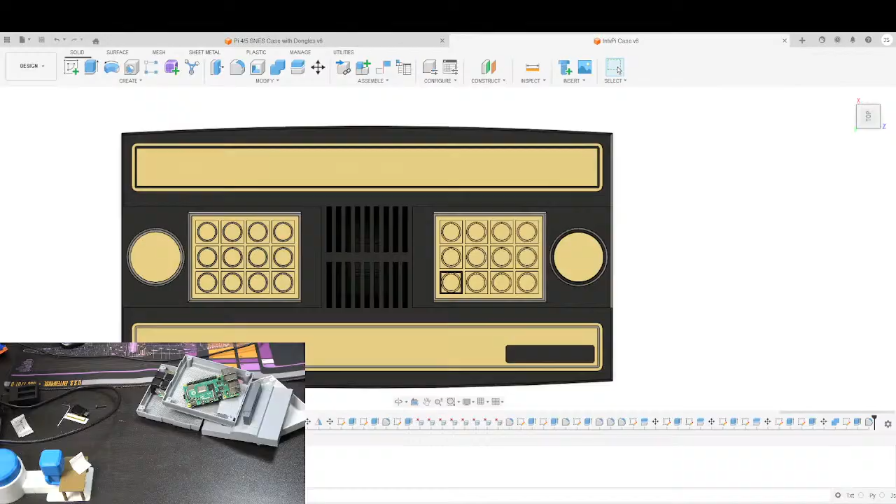So let's go ahead and swap. This guy. Yeah, we'll abuse this one and blow it up. Good enough for now, we don't need perfection.

Remember, you may recall that during the stream last week I said, oh, I don't have a model for the Raspberry Pi 5, so I'll just use the one for the 4 because they're basically the same. Well, as you can see, this is the first bottom shell that I printed. Oh, I didn't realize how far into this I was going to have to reach. Okay, 2 seconds here. So this is the first bottom shell that I printed.

There's the ports and everything on it, and if we go ahead and drop our Pi 5 in, you can see the ports line up. Oh, there's no headphone jack on this one, and what you probably won't be able to see is that the screw holes and everything also line up when it's properly positioned.

So you think all is well. Well, then I went to put the lid on it, and my USB dongles end up stopping it from closing. So at first I was like, oh, I must have mismeasured something. That's not too big of a deal.

But no, my mistake comes from, if we take a Raspberry Pi 5 and 4 and put them side by side, you'll notice that the Ethernet ports end up together. The USB ports are on the opposite side. So while I did measure these ones for the proper height, it was assuming that the USB ports, because I used the model for the 4, would be on this side.

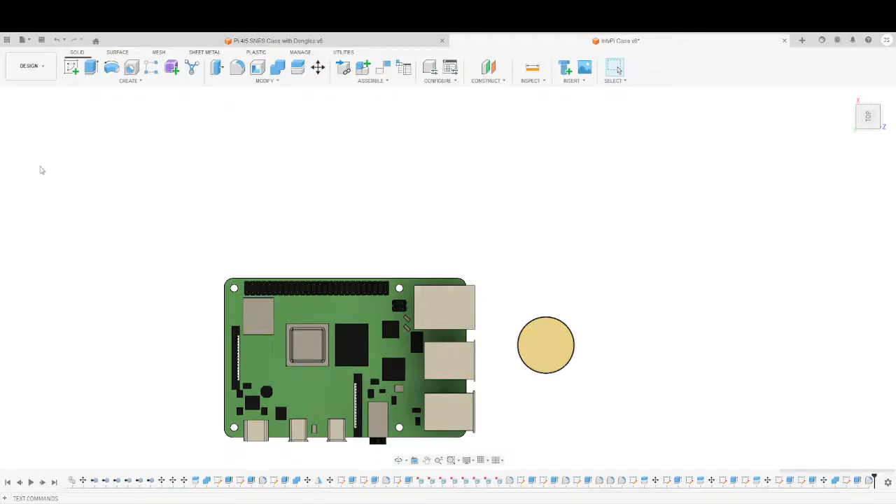Hey Nathan. Well, I don't have a good recommendation for a free one because I haven't used many. No, that's what I'm here for. I'm happy to answer questions.

I don't have a recommendation for a free one right now because I've only really used Fusion 360 for most of my modeling, which is free. I think it's a great product, and if it continues to be free, it will be good for people to use. But there's no guarantee it's going to stay free year after year, and that's my concern right now - if I tell somebody to start using it, a year from now they may not be able to use it anymore.

So I'm going to put the image up here, shrunk down as well, just so we have it. Don't know why it keeps blowing it back up, doesn't matter anyways. We're going to shrink it down. It's not exact, but I think it's close enough that people get the idea.

I will check out Discord later, I appreciate that. Daphne got you a new headset - that's good, how's it work?

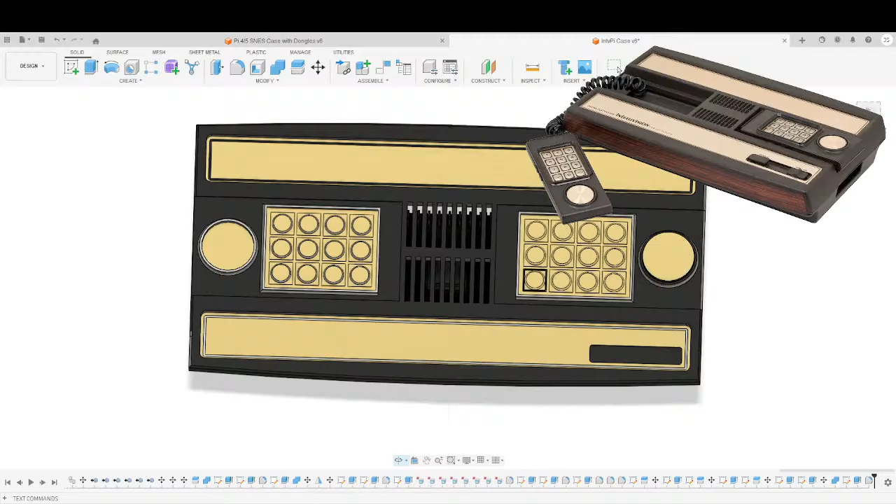Can I make the actual Intellivision a little bit smaller, or is it getting hard to make out the details? Like if I go down to that, is that good enough?

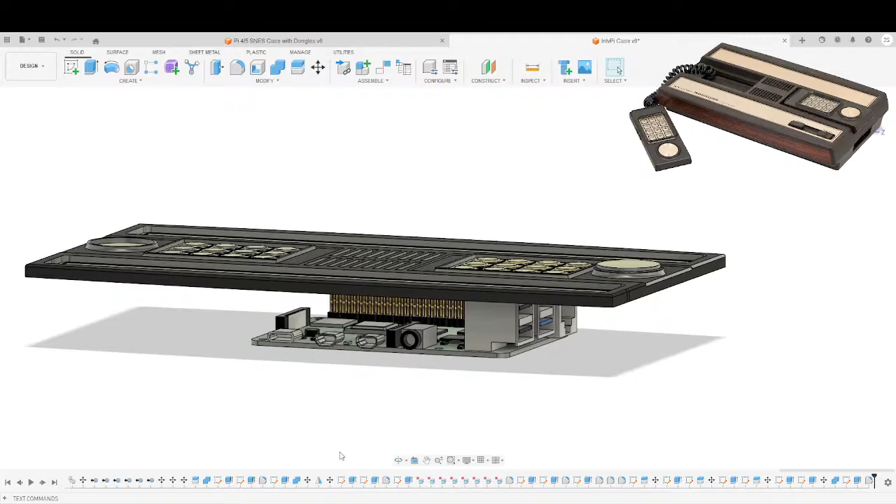The other thing is I've done an Atari case before, and the Atari case obviously has wood grain in it too - this has a wood grain band that goes all the way around it. For the Atari one, I used MacTac, kind of like sticker paper with a wood grain on it. I cut a strip, cut a template out, and put that on. That worked pretty well, but I was wondering - is there a way we can 3D model in the wood grain?

Alrighty buddy, have fun. Tell the family I said hi.

Is there a way we can model in the wood grain and have it mix between black and brown? I don't know - I can imagine I could brute force it, make it possible for that to work, but I'm just not sure if there's an easy way to do it. Certainly not easy in Fusion 360. The only thing I could think of is if I found a vector file of a wood grain, I could basically apply it over top, then do an extrude type thing, and color one part black, one part brown, and have it switch between colors. So that's kind of where my thought process is right now, but I'm just not sure yet.

So this is going to be designed to have a 40 millimeter fan. That's how big I've built the vent, which is kind of the sizing of the vent, and that's what dictated what size the case was going to be.

Oh, that's interesting. I have not played with that before, Mitch. Also, welcome to chat. Good to see you as always.

So I'm going to go ahead and put a rectangle on here. We're going to do corner to corner to get the halfway middle point here. And then, if memory serves, I think...

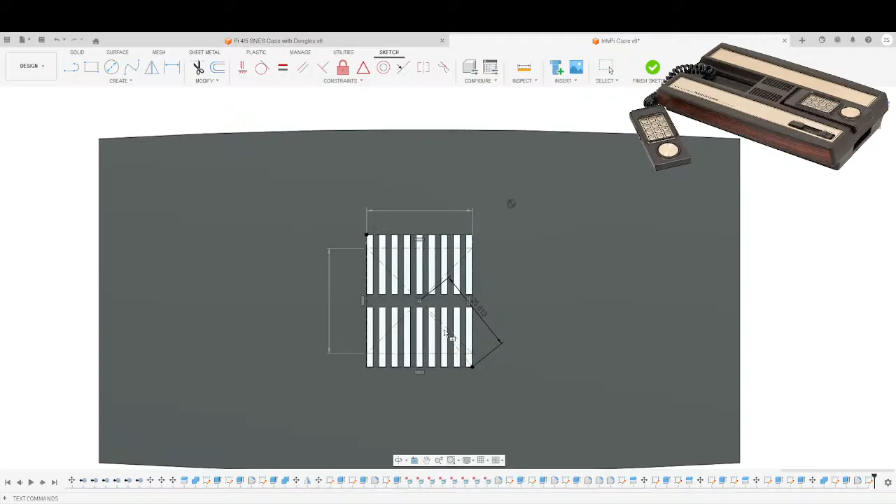Oh yeah, this is where it's going to become a problem. The screws for the fan, I think, are 32 millimeters in. So I've got to double check that. I believe they're 32 millimeters from corner to corner. Yeah, 32 give or take 0.03.

Always forget something, but that's okay, we can work around it. The rest of the modeling I put into it, I don't want to waste. So instead, knowing that there are mount holes here, we're going to make them 2.85 to allow for 3 millimeter screws.

Don't know why it keeps going into the... what do we call that? Oh, there's a mode where you can put in a line that's not divisionary. It's kind of just for doing like measurements and stuff, so the dotted lines don't actually divide anything. I think it's a construction line, now that I think about it. It kept going back to construction lines, which is not super helpful.

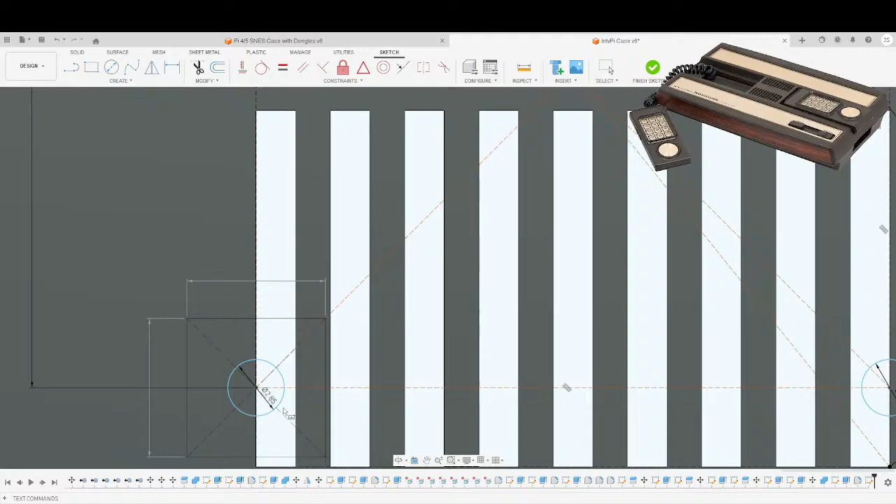But let's just see, do 6 by 6, 7 by 7. Yeah, that'll probably be fine. So we're just going to do a 7 by 7 on each of these.

And this is just creating a spot for the mounting of the screws for the fan. We're just going to do a press pull on each of these. And yeah, it's going to be a little obvious when you look down through the vent that there's pieces of plastic across it. But, you know, what are you going to do?

We'll probably make those 5 millimeters tall. Maybe we'll go for 6, and then I can use up to probably a 1 centimeter M3 screw. How obvious is it going to be from under here? Well, you're going to see it, but once the screws are in it, maybe not so much.

It's all good. So I think it's under the surface menu. Well, once I get the outside of this modeled, we'll take a look at that and see what we can do.

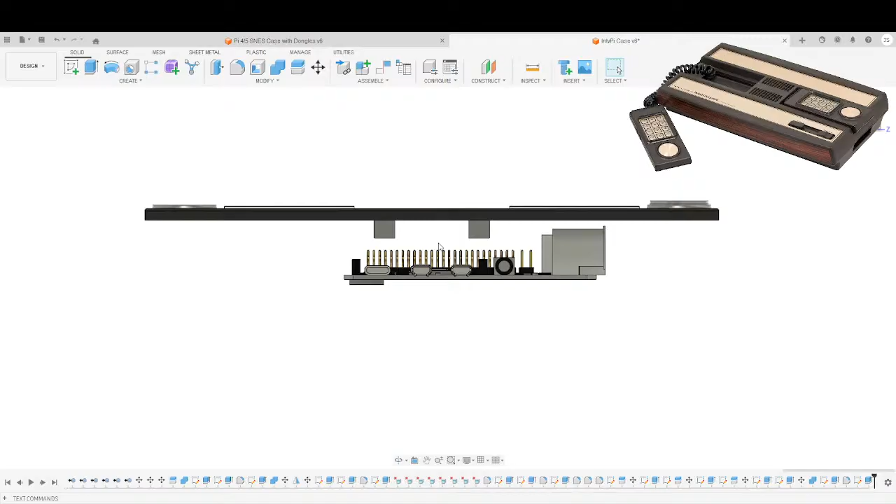So now let's take a look at where that puts it in comparison to the Pi, because we also want to make sure. So then there's going to be the fan on top of that, and then we're going to have heat sinks on top of here.

So I think we're going to, oh, this is going to complain again probably. I don't know if you, for those who were here last week, every time I went to move the Pi, it complained. It was an error I hadn't seen before, saying it had to basically create a new version of it. Following components may be rigidly assembled to the default component and can't move. Would you like to create copies? And then, yeah, so I just say, yeah, let's create a copy.

That's weird, why is it not... Call it there, that should probably be plenty, I would think. And then we're going to do a remove on the original one.

So now we know how deep the console needs to be. So we're going to do an O for offset.

No, it's doing... I must have hit I by accident. I'm going to do -2. Seems to be plenty for a case design.

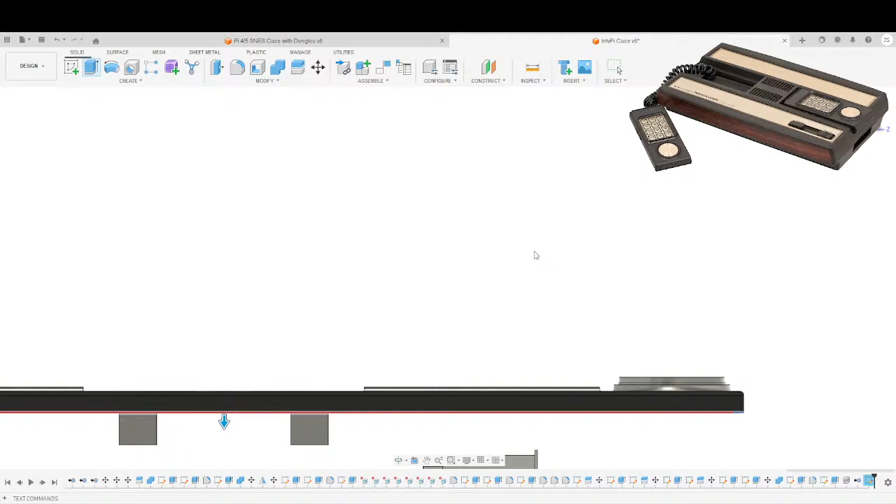We'll go ahead and drop it down, and we're just going to get it sort of just tall enough. Call it 30 maybe.

Now obviously that makes it a bit chonkier than the original. Of course, if we want to, so the original one, we go to say the halfway point.

Then we're going to create the bottom off of that. I want it to swoop in a little bit more. The original one has a design where it kind of swoops in the bottom, so the bottom part's smaller than the top part. So let's say we do an offset of -5.

Then we do a press pull on there, and we're going to do a -2. That's going to be the bottom when we get there. So then we'll do a move on this guy.

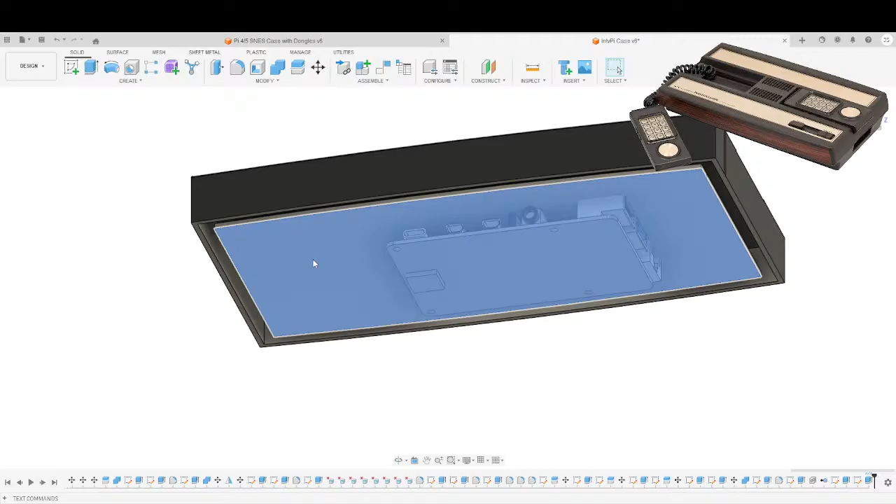We'll bring it down. Where's my positional? That's interesting. There we go, might have already been there and I just didn't see it. 20, no, we can probably do minus 17. That should be plenty, I would think.

Okay, so then, let me think here, how are we going to do this? Need to think. Because I do want to create that sweep. Okay, I'm making this up as I go along, so I don't even know if it's actually going to turn out the way I hoped.

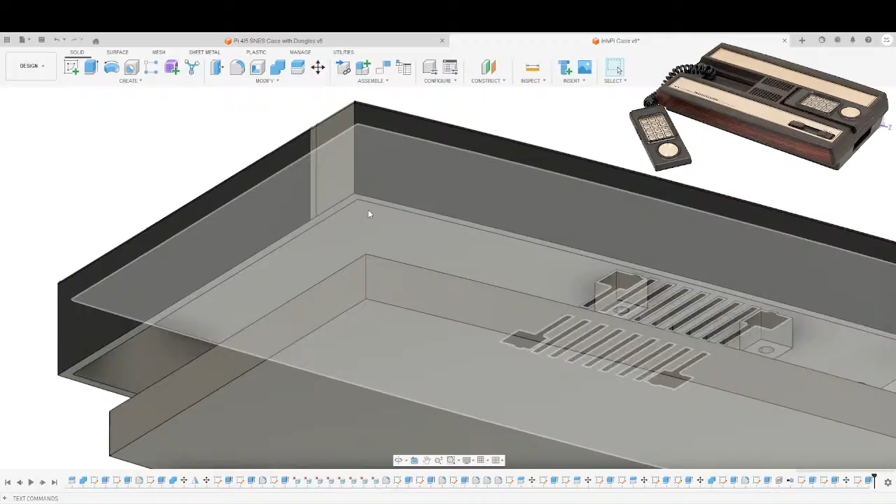But let's go, say 7. That's still obviously big enough for the ports and stuff on the Pi. And then we're gonna do a press pull on this guy. It's the whole thing, and we're gonna do to object. So that's gonna connect it to the bottom part.

We're gonna do new body, because what I want to do, interesting this line here, I'm not sure what's up with that. Combine this one and this one, and that gives us that, and then...

Let's see if I can get the curvature that I want by using a simple fillet. I don't know what it clicked here, but 5, 6, 7, let's see how close we get. 6.2, 3, 4, 5, 6, 7, 8, 9, 9, 5, 6. But 7 was too much. Well, I guess that's probably...

I'm trying to find the link for you, it's the Pi 5 PiJuice 5 UPS. Is that one of those UPSs that kind of sandwiches onto the Pi and runs off a couple of, what are those cells, 18650s? Because I think I have one, although I don't know if it's capable of running the Pi 5. I think I have one for the 4.

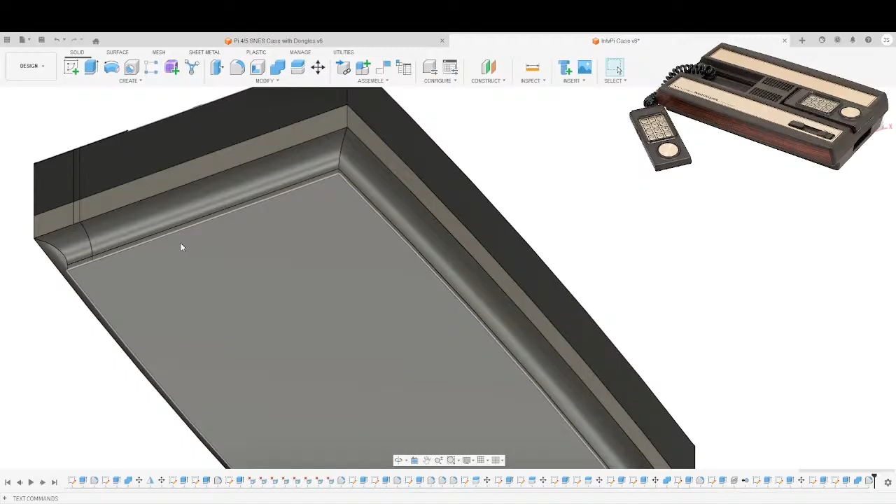Okay, so that's pretty accurately what I was going for, to be honest. That doesn't look too bad at all. Other than, you know, the thickness.

But that's okay, so then we're going to hide the top body. And we're going to modify, and then we're going to make this into a shell. Call it 2 millimeters thick. Bam, there we go. That's not too shabby at all.

So then bring the body back. Yeah, so it is thicker than the... I don't know what's creating this subdivide here. Is it like that on both sides? No.

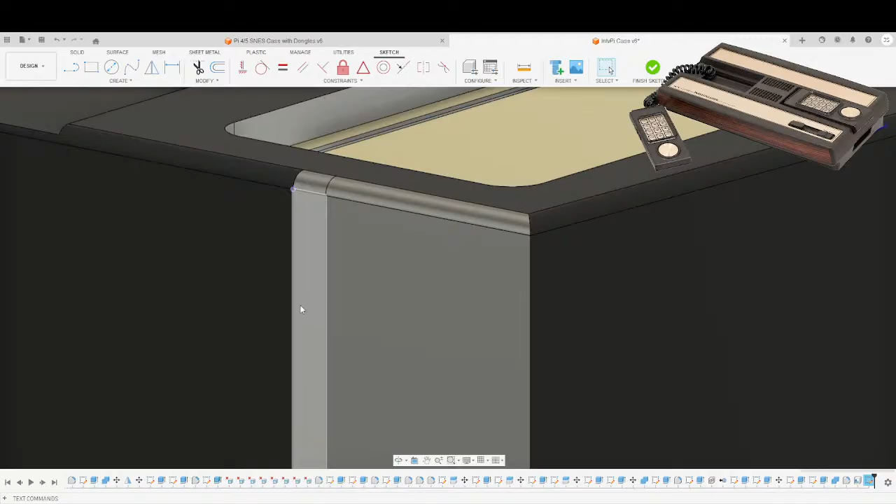So let's do a... maybe something just got a little messed up. Press pull, we'll do to object and see if it just... nope, it's saying it's the same... can I just delete the line? Weird.

Unless it's... I'm trying to see if... looks like there's a cut in it, maybe? Yeah, there is. Okay, so if I can get in there and just do a press pull on it. No, hold on, get out of here.

Nope. Come on, I keep... I don't know if you guys can tell. I'm just trying to like get it just to highlight. And yeah, it doesn't... what a weird thing. Come on.

There's like a 1 pixel gap where I can kind of... no, that didn't work. Okay, can I delete this part, maybe? No, I can't delete it. Okay, well, let's...

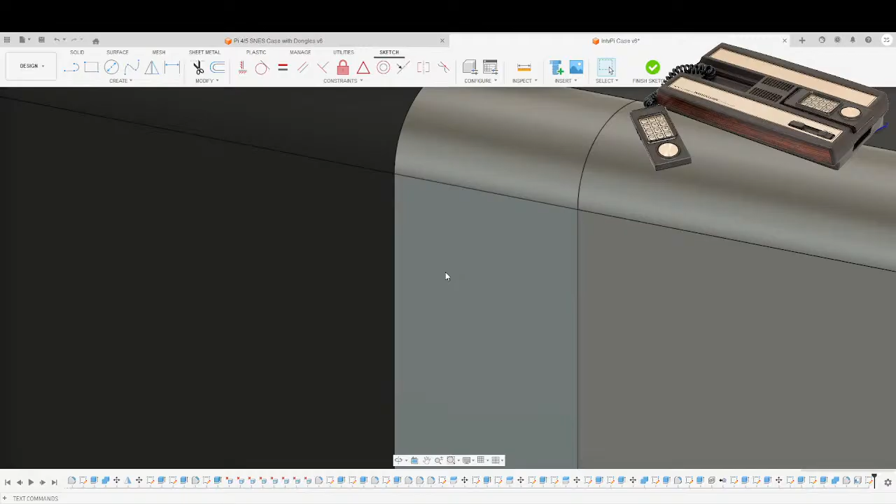Do this, let's do -2 on it. -2, -2, no, let's do -1, because I just want to see if... see, I thought that might get us access into the part that's broken, but also realizing that my face is not currently on the stream, which...

Can we just drop this back in there? Bam. Move me over here. Good enough. Okay, so then we're going to try and do a press pull on here. We're going to do -2. This one, it's fine.

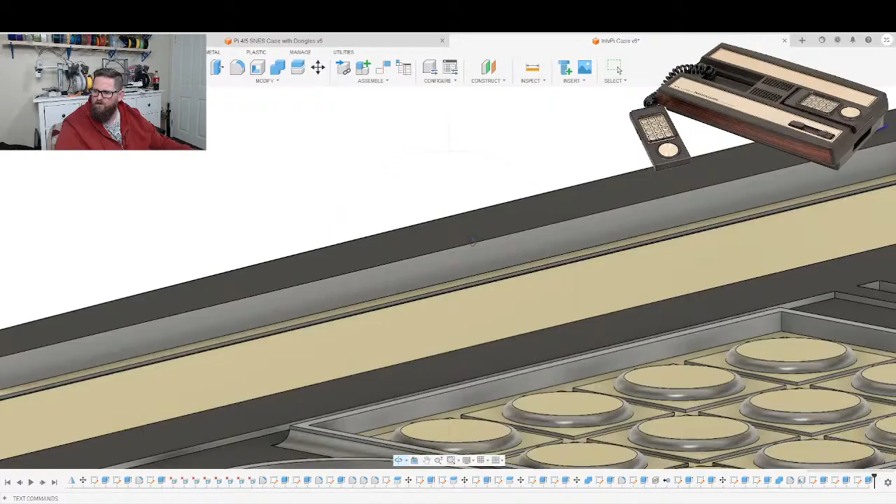Okay, and then if I do that and I do this, which is to say if I right click and do press pull, can I then marry these surfaces back together? No, it immediately created that line again. How very odd, except for, and this time it looks like, it's not even.

I wonder how that happened. Can I press and pull this all the way to here? That probably breaks things, right?

Going to try and make this work, I just haven't figured out how yet. New body, let's do that. Modify, combine this guy and this guy. That gets rid of that.

And then can I fix this corner just by doing this, this, this, and pulling it across? Does that give me my proper corner back?

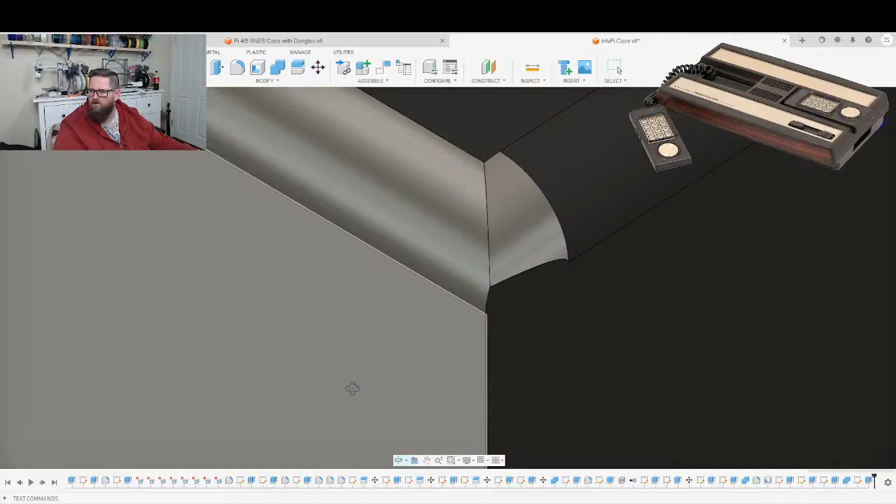Not really. Let's see what happens if we paint it black. Still have our messed up line there. I think we're just going to back it off, go back to where it was. Might revisit that in the future, but for now, good enough.

Okay, so much like the case from last week, chat's quiet this week. I think we lost most of the people.

So much like last week, the HDMI and stuff is going to be inset a little bit into the design. So we'll go ahead and do a panel off there. Let's see, so coming off of here.

Oh, no worries. Nobody has to chat. It is not that big of a deal.

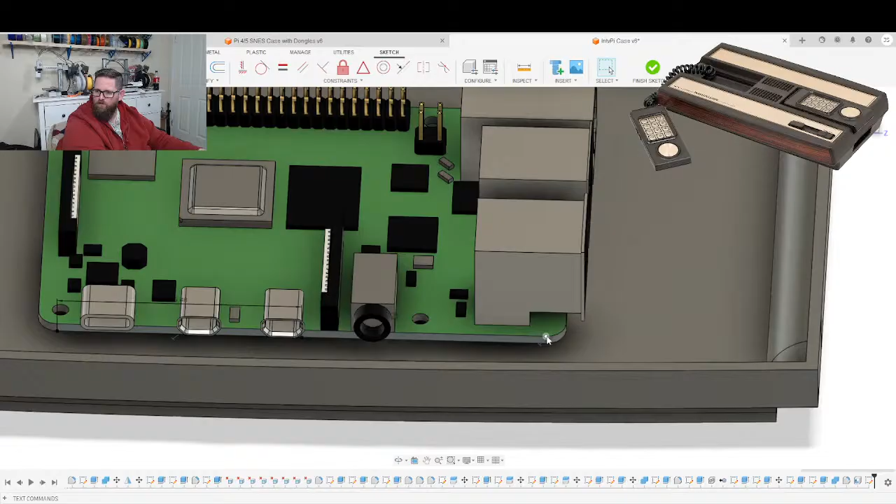So let's go here and then divide by half. That should give me the halfway point of the Pi. Then we're going to do a rectangle off of there, and we'll do it, I don't know, let's say 80. 75.

Maybe I don't need to go off of the middle. Maybe we're just going to go from here to here, so I'm just going off of the edge of the Pi. Keeps turning on construction, I keep turning it off. We'll do 60, is probably enough.

And let's do a top view. We'll hide the bottom part for now, just to - I think I said 60 and then 10. And then we'll do 60 for the width, and then we'll do 5 off of here, maybe 7 just to make sure that it intersects with the bottom.

And then one of the key things that we're going to want to do here, if it'll let me select the whole thing - so I'm going to make this 2 millimeters thick, the same as the shell. It seems to have already decided a thickness, 2 millimeters thick. But I'm going to do an offset, and the offset I'm going to do it like 0.4 millimeters, just to give some space between the Pi and the back panel.

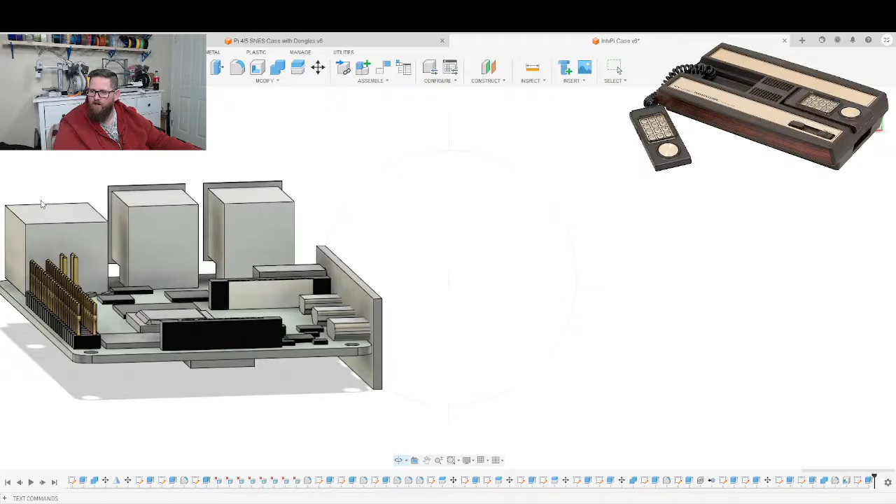So now that we've got our shield placed, we can bring the bottom back. That shield, you can see it does touch the bottom. What I'm going to do here is I'm just going to bring it out -1. That'll put it into the bottom shell without it extending out the bottom like that.

So we'll do that, and then we're going to add some additional rectangles off the bottom of this guy. So there's our 16, and then let's say 25. And the goal is for me to get this to extend out past the casing there. And then we're going to make these into 2 millimeter thick pieces. We're going to do a new body.

So we've now created this panel that'll essentially go from the outside edge to the inside of the I/O panel. So we've joined that up. Let me just reopen chat - I just realized it minimized. There's chat, we're good to go.

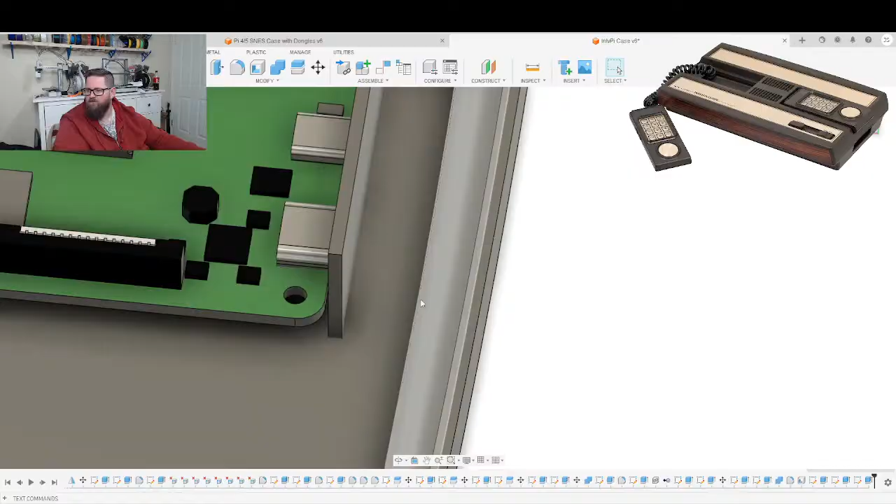So we've done the first one. We're going to do the second one, and it's going to be the same type of thing. So we're doing, I think it was 16 millimeters, and then I said 25. And then we're just doing a press and pull and making it 2 millimeters thick, switching to a new body so it doesn't cut. And there's our panels.

So I'm going to - and you don't really have to do this part now - but I'm going to go ahead and turn this into one piece. Now to get this to match the curvature of the shell, what I'm going to do is a modify and then a combine, and I'm going to select the I/O shield part I'm working on as the target body, and then select the Intellivision case as the tool body. We're going to switch that to cut, and tell it to keep the tools.

So we do that, and it doesn't really look like anything's changed, except as I highlight over here, now you can see that these are separate pieces. So I can go into my body list, and I think last week I was told you guys can't see my context menus - but in my body list I can find these two pieces, which are case body 42 and 43, and I can remove them. Now I'm left with an I/O shield that for that section matches the curvature of the Intellivision design.

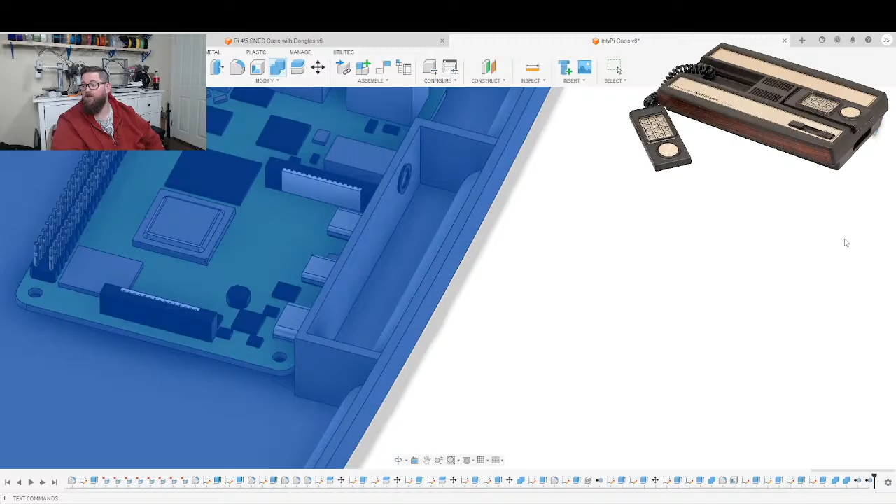So then we're going to now finally combine the shell with this piece. We're going to switch back off of cut because we want to join, and we're going to tell it not to keep the tool. Keeping the tool says that whatever happens to the piece I'm using to do my join or cut, keep a copy of it so it's available. Since we're turning this into one piece, we don't really need it there right now.

I'm going to use my unmodified panel here to, oh, that did not do what I was wanting. I'm going to use it in a cut motion to take out the side of the case. It looks like it might not have been quite as tall as the case, so we'll delete that. Then we're going to also take out the bottom of the case, because this is now going to be the shape of the bottom, like that.

And then finally, actually I'm going to backstep because I just realized I still want this to follow the casing here. So we're going to start instead with this one. Press, and this is going to give me the ability to get into this cavity after I start working on it.

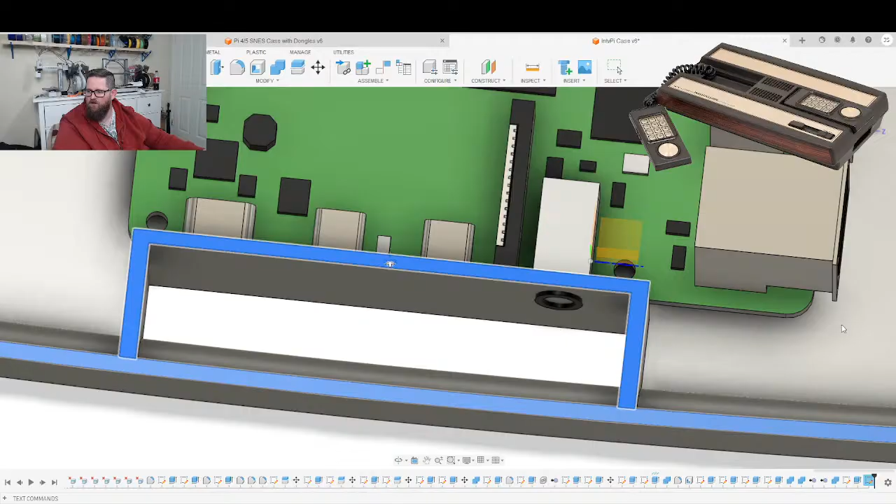Then we're going to bring this up, so I'm right clicking on here because you can see they aren't the same height based on these division lines. I right click, do a press pull, and do it to object and tell it to join. We can see, yeah, it's doing a join. Now we have a solid body structure all the way across, and that looks good.

So now I want to add a 2mm lid to this so the case is closed in. We'll do a join on that. Then finally, we're going to go to the cavity we created underneath here, right click on it, do a press pull, and I should be able to rip that right through the case. We are now left with what will be an access spot for the inputs and outputs from the Pi.

I think we're going to move it down one more notch. I know it's going to complain and I'll have to delete the copy it makes, but I just want to move it down 1mm. Not quite enough to... let's do -1.5 to make sure anything doesn't make contact with the bottom.

Let's take a look here. Yeah, see, that looks a little bit better, assuming you were putting a Pi 4 in here, which I am. Okay, so now

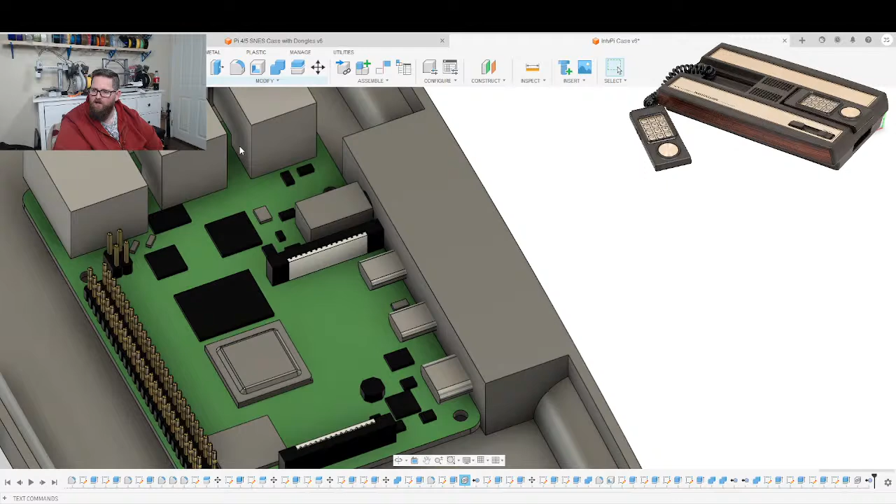we're going to do a combine. We're going to select the case, then select the Raspberry Pi. I think I have to select the ports individually, maybe? Yeah, it looks like this. And we're going to switch to cut. That's going to leave imprints, if we then hide the Pi, wherever it made contact with it.

So we can then just go through here, add an offset. Let's do 1mm offset, -1, -0.6. That should be good.

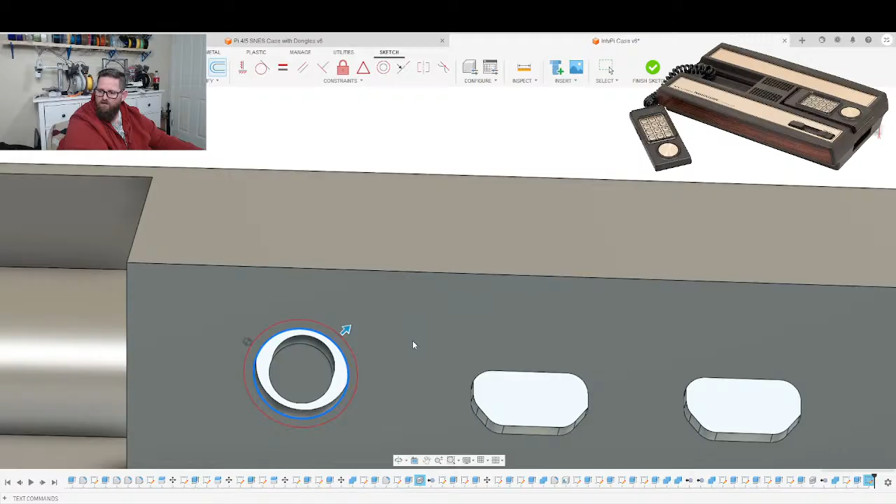Drag it out. Okay, so what this has now given us is a pretty snazzy looking, in my opinion, although a thick boy. I keep forgetting how thick it is until I put the top back on. But if we put the Raspberry Pi back in, you'll see, oh, now all the ports are accessible from the outside on the back.

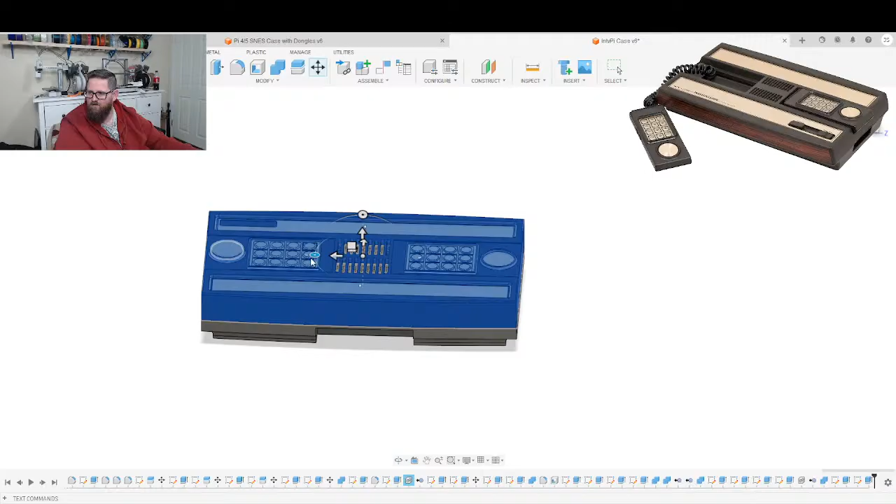Okay, we're going to do a move on this guy, body. Hoping I can kind of hit the center spot here. Let's see. Because I started with the center spot. So if we start there, and we also select that one, and then trying to see what else is here for. Let's just see what happens. We're going to do a full 180 degree rotate. Are we good? Well, I think we got away with it.

Oh, I did this again last week, eh? Hey Sean, sorry I didn't recognize your name right off the bat. Whoopsie.

Come to think of it, I owe Sean a design. Let's see if I've got that picture on here. I might have to send it to myself from my phone. Oh, there we go. Let's see, where is it? I'm just scrolling back through messages.

Doesn't look like it should be too difficult to make happen there, Sean. Let's take a little break, a little segue off of what I've been working on. I'm going to start with yours now before I forget. It's all good, I don't think it's going to be a terribly difficult design. Let me see if I can get this hammered out for you.

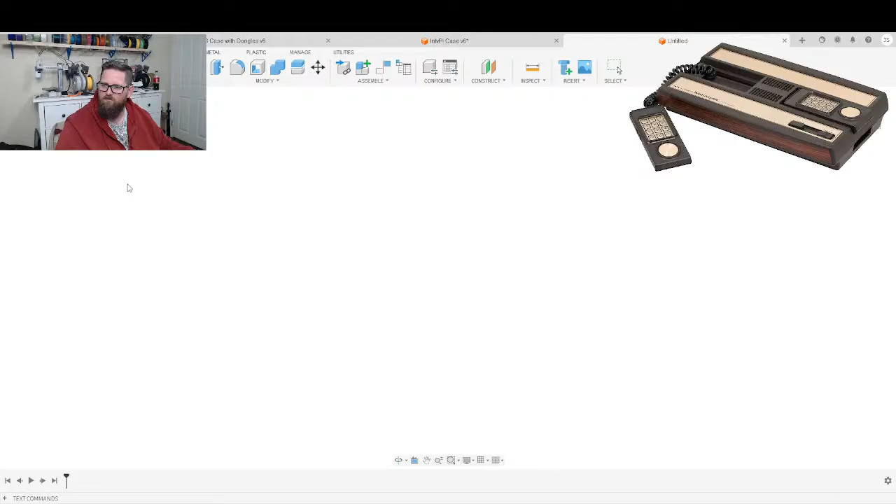Let's go ahead and create a... let's go top down. We're going to go 120 by 80 probably, and let's do a press. Actually hold on, I think there's a way I can do insert canvas. Was that desktop? Sean's Rocket, and let's just...

I feel like you might have told me that. I apologize for not remembering.

Okay, so let's start off with, I don't know, a line from here to here. Then going to add an arc. Kind of follows. And maybe, is it that simple?

It's been a while since I've done one of these. I know that there is a way with this spline where I can go... whoop. No, it's going too bulbous on the end there. Probably close enough.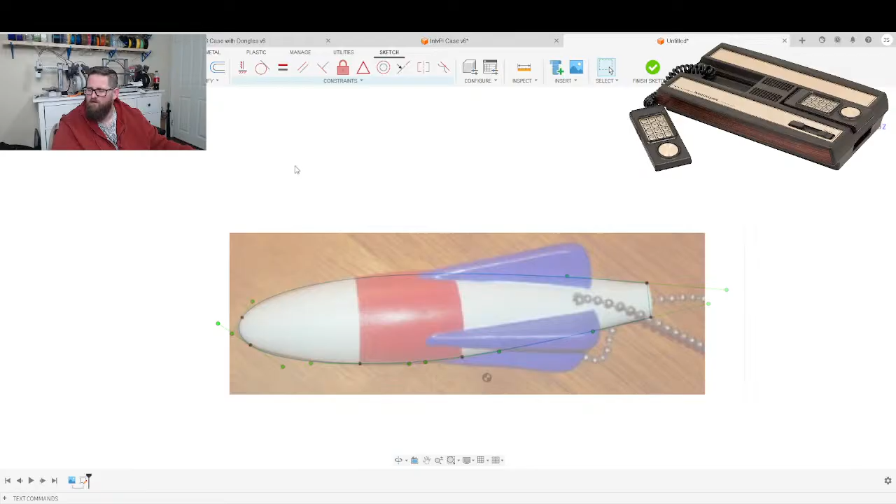Then there's a way to use this to create a... there's a way to turn this into a revolve, is that what it is? And then the axis, kind of do a... there, and then I don't know. I'm going to try it this way first, and then we'll see what happens. So let's do create.

I literally just... yeah, it was a revolve, right? Where are you? Revolve. We'll select this, we'll select this. New body. Cool.

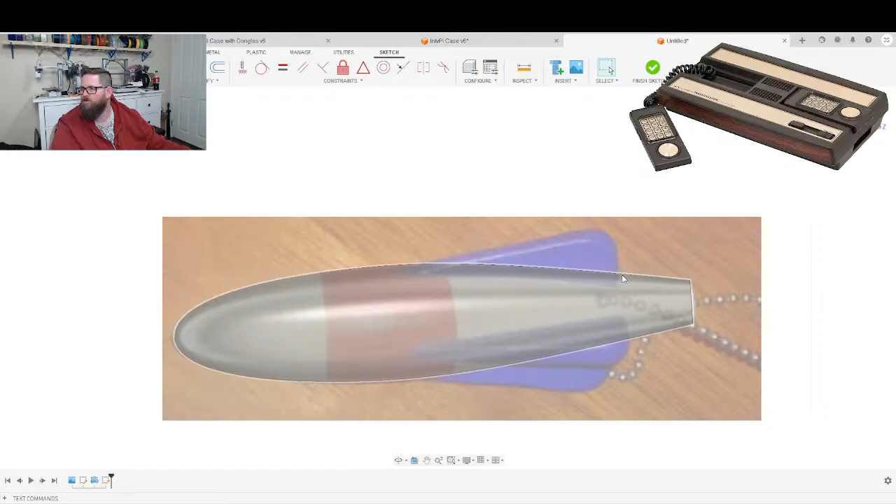Then what I want to do is go back to here. I'm going to create these fins. Actually we'll do it like this, so we're going to do like this. I don't think it's actually... oh, it's because it's totally locked onto the wrong side. Finish sketch. This side.

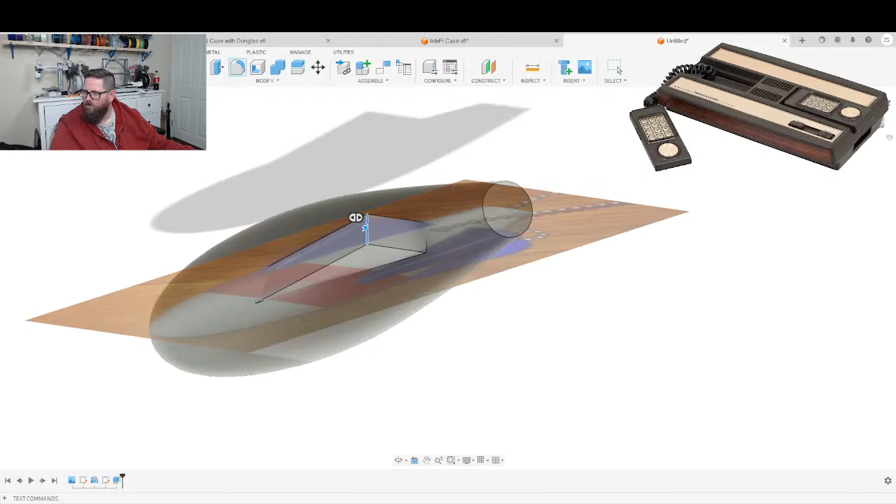Call it, I don't know, 2 millimeters thick. It's going to be a new body. Then it looks like it might be too thick for this. Let's go 1.6 maybe, new body. Okay, I'll do that, and then we'll do a fillet off of that, and 2.4 maybe... 2.2. That'll probably be okay.

Move body. I think starting with the drawing might have been a mistake, because I made it angled for no good reason. But yeah, let's do this again, but not on a plane like this.

Let's do here, and we're going to start off with a line. We'll make it 20 and 10, make it 10 millimeters. So then we're going to say the center point is likely about there. And then we're going to do, let's see, what are we doing? We're doing a spline again.

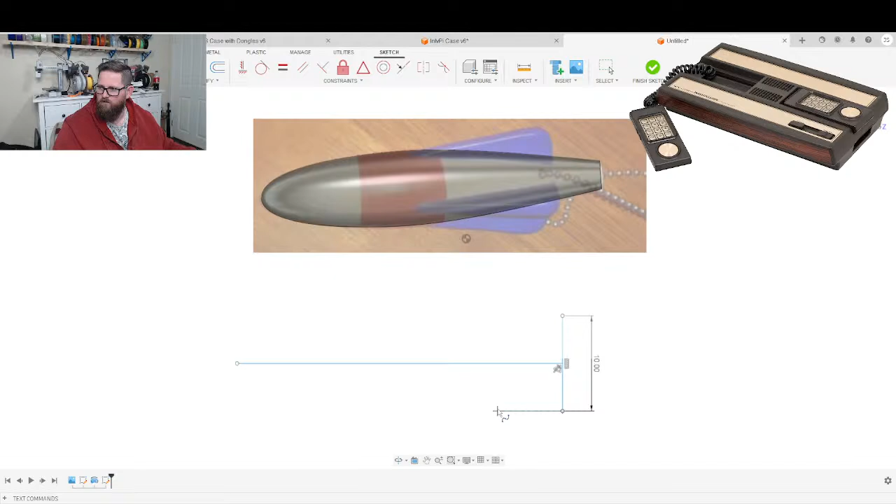So we're going to do like this, and then see, it's... so we're just kind of not a straight line, but there. Then like that. I think that's still too much though. Let's start off on this side maybe and see if I can get... no, I did that wrong.

It'd be easier if I could shape it after the fact. So I'm just going to try and put a bunch of different points in here. That, we're going to check mark that off. And what I'm hoping I can do... no? I thought you could then just select them and drag them around. Yeah, okay, that's what I was thinking, like this.

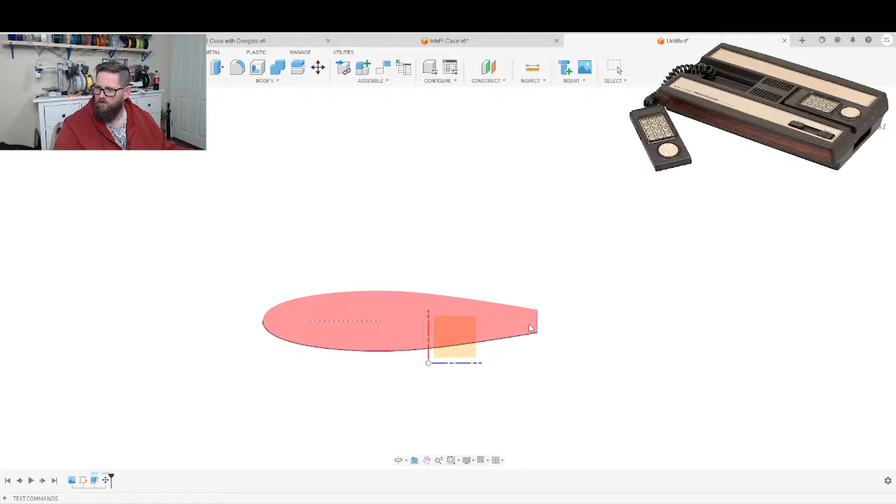Kind of looks straight there. Create, revolve this guy, new body, do that, and we'll just hide the original one for now.

There's a seam on it, but I'm not going to worry about it. There should be a center point to this, I would think. Doesn't have one for some reason, even though it was created off of flat.

So what we're going to do should hopefully allow me to just do... no, let's do it here like that. Does that put that ahead of? No, it puts it way off and not where I need it.

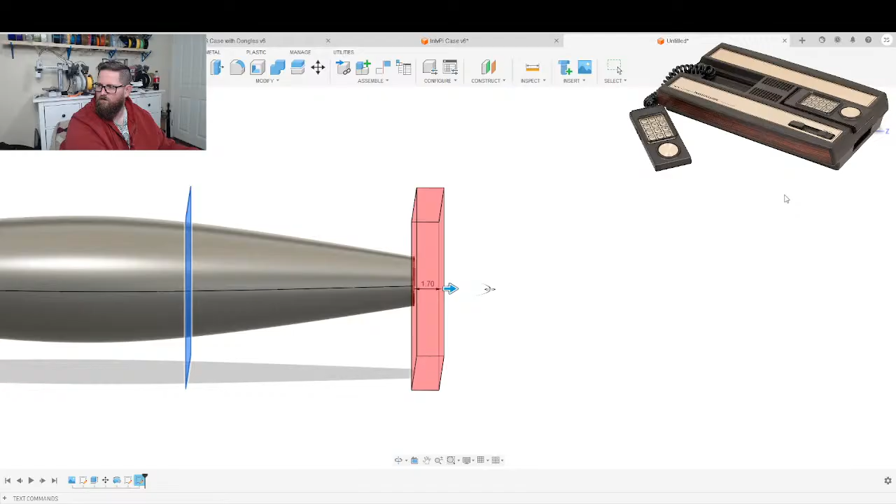The ability to draw on this. No, maybe. Okay, that's fine. We're just gonna do a 0.8. No, let's do a 0.2. We'll bring it out to kind of where we expect the fins to end, and this one's also going to be 0.2.

Then we're going to do a press pull on both of these guys. It's going to be fine. Going to do up into the rocket. We're going to do new body. Just like that. We're going to bring the canvas back.

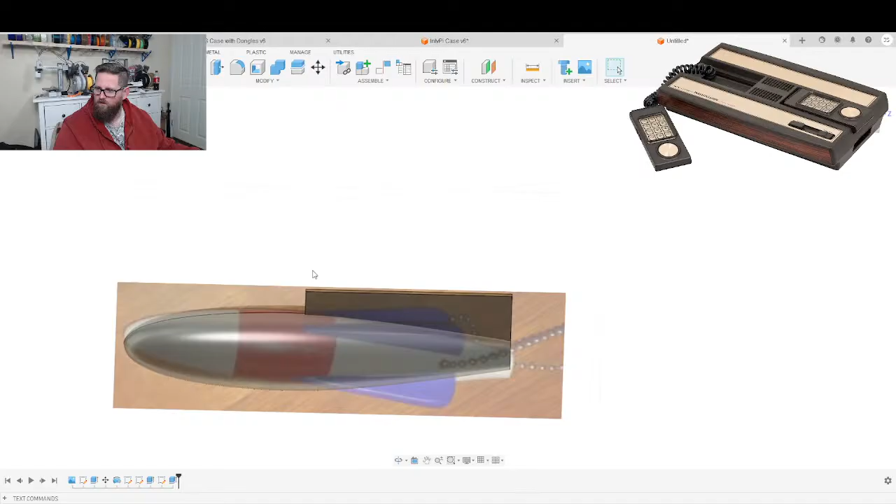And I think from here we can then figure out that they're supposed to be about yay off the bottom, and then disappearing into the rocket.

-2, let's just do -5 to make sure that we get it all. Take out the initial body and just modify the fin. And then we'll do a fillet on that. 2 maybe.

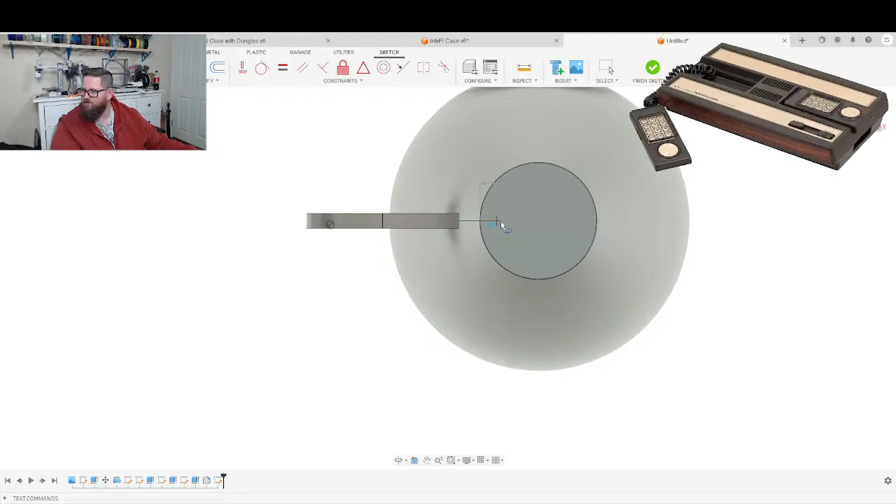And then we're going to create a circular pattern. This is the body, this is the... and it doesn't recognize that as being a circle, which is a problem for me personally. But you know what, if we consider this as being the halfway point and I divide by 2 and then say, hey, I'm going to put a circle here, I should be able to do that.

And then I should be able to do create pattern, circular pattern, select our fin, select our axis. And that should give us our 3. Then we can get rid of the canvas.

And then if I do a line here, and then another line here, finish, and we do a modify, split body, select this guy, and that guy, and that guy, and we cut it.

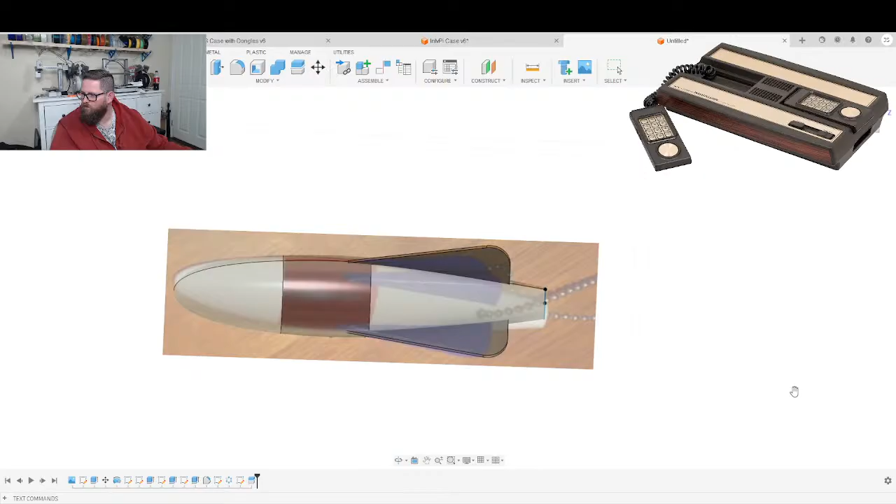To bring out our colors, and we go white, toss some white onto here and here, and then we go with red, and go red in the middle, and then we go with blue.

We do matte blue on each of those fins. Close it, and then we hide the canvas.

Is that pretty close? I guess Shawn will be the one to sort of answer that.

I'm going to do, and we're going to use these to cut these, but we'll keep the tools. Then modify, combine again. We'll do that, that, that.

And we now have a relatively easy to print multicolor model, because each of the components is a different piece.

Right. Top cone, fin 1, fin 2, fin 3, bottom cone, and middle cone.

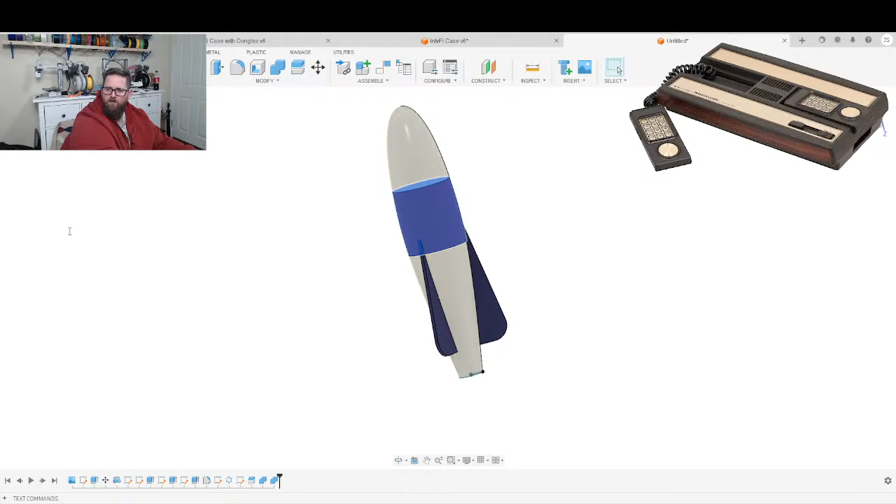And we're going to remove the extra one, and that should do it. I gotta remember how to save. Oh.

I know it's not a rocket. I keep calling it Shawn's rocket. I don't know if that showed up in the save thing. I also misspelled rocket. So save as mesh.

Structure one file. We'll say OK. And... Shawn's rocket.

And I'm not gonna show the screen because I'm gonna quickly drop it into Bambu Studio and make sure that it shows up properly for multicoloring.

And then Shawn, do you know how to print things in Bambu Studio yet? Because if not, I can quickly paint it and then save it as a Bambu file, and then you can just get it and size it to whatever you want, and then you're good to go.

Also, did you want me to put a hole through it so you can use it as a keychain, or you just want the model?

I asked a bunch of questions, so I'm going to have to get you to be specific about what we're saying yes to.

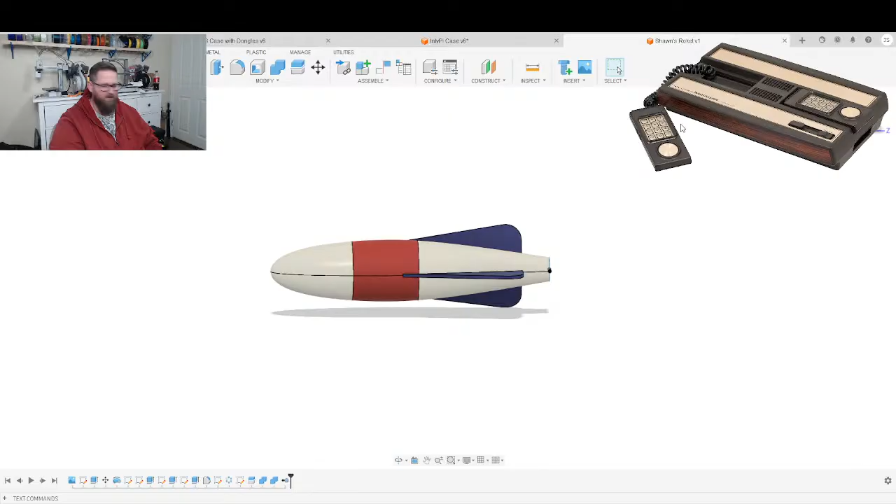Okay, so continuing on our case design here.

Yeah, I'm trying to remember. I know the soundboard on that one was a piece that could slot in, because I figured not everybody would have the same amplifier I had. And I don't even remember how the Pi's mounted inside there now. Is it on a piece that you glue in? This is obviously going back quite a ways.

Which side is the front? This is the front, which means this side is the cartridge slot. So what I'm going to do... I think, yeah, I would do things differently. Well, and I have done things differently since then. So, we'll get there.

How tall is that? 18.54. And then we're going to just bring this across, and we're going to add kind of a similar gap there. We'll call it 56.6. Then we're going to press pull, and we're going to do -2, or 1.6 maybe. I missed pieces, and we'll do new body. Cool.

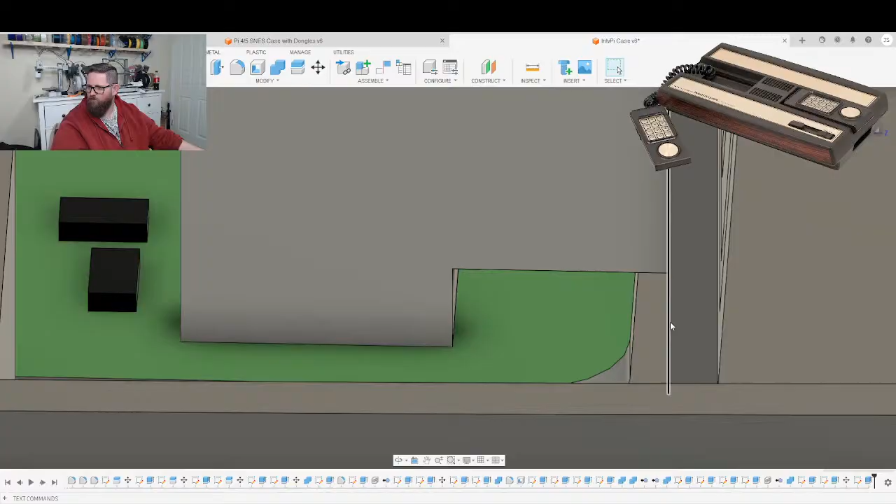Then we want to move this. Actually, it kind of doesn't even... It looks like we're not even touching the Pi, so that's probably good. Then we're going to do a modify, combine - same type of thing we just did. Select the pieces of the Pi that we want to cut it out. Done. Hide the Pi.

Then, actually, so what I'm probably going to do, because I want this to be compatible for the 4 and the 5...

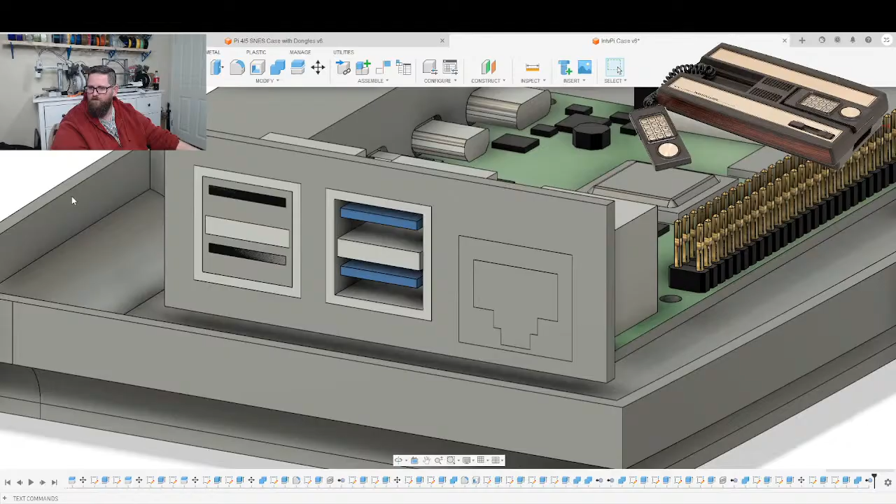Go another 2 out from there, and then -2. And we're going to... we'll do the same thing actually. We'll do the modify combine. We'll use this to cut things into it like that. Remove the extra pieces we don't need. Then we're going to hide the Pi.

And so do -0.4, maybe 0.6, just to make sure that we got plenty of space.

Hey, I'm glad you like it. I'm glad you like it.

Go ahead and cut this into here, and then give me... perfect. Perfect, perfect, perfect. And then we're going to hide the lower body, which I guess is this one.

Hey, I'm willing to try.

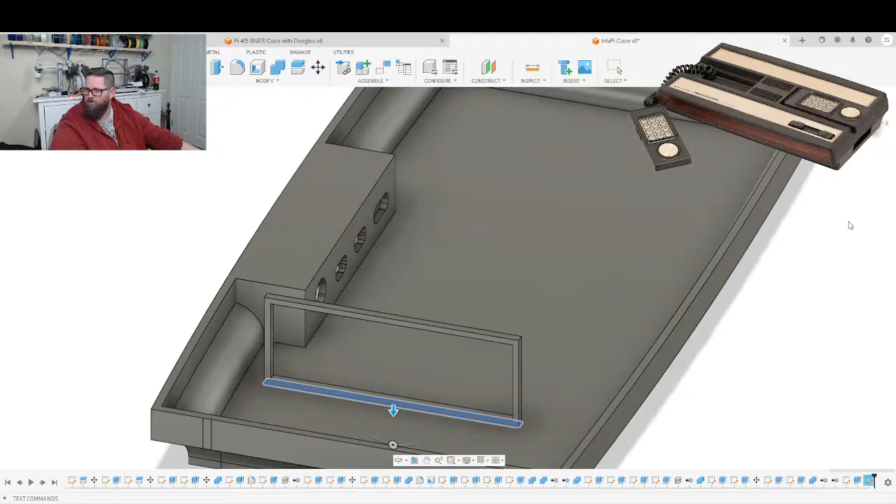Well, not all of the cases I've designed are uploaded. I think most of them, if not all of them, are still on Thingiverse. It's been a couple of years since I've uploaded a design.

Yeah, my wife and I recently relocated, and a lot of the stuff has just been getting things ready in our new house, and as a result, I haven't been as active as I once was.

That should be good.

This is very similar to what we just did, except for... I'm losing steam. Just a little bit.

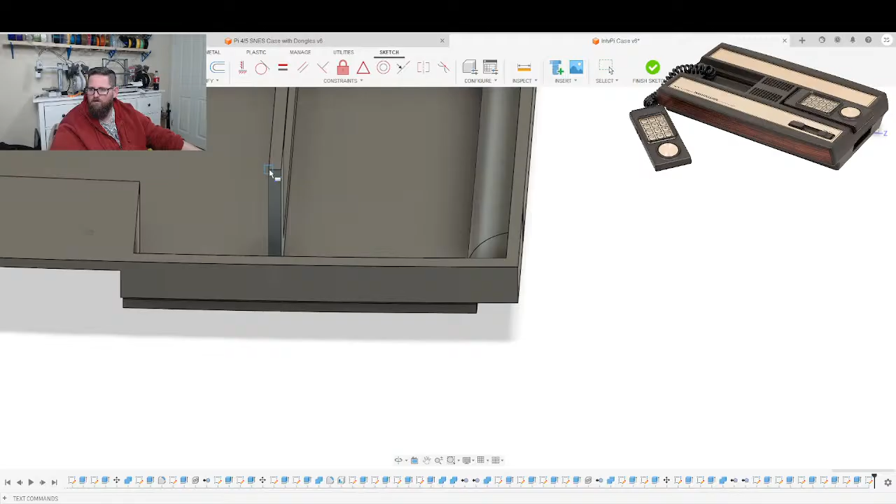25.560, we'll just have to try and remember that. We're going to go all the way out. -2. New body. 25.560 - doesn't really matter how long this is as long as it clears that. -2, I guess it's just 2. New body. There we go.

And we do combine. I'm pretty sure that's already done actually, so we're going to do a modify. Oh yeah, combine still. We're going to select this - this is our cutting tool. We're going to keep the tool. Oh yeah, this isn't going to work as well because those pieces are big enough to be all the way across, or they're taller than the rest of the case. Select this. Nope, not that. Select this, and then that, and then that.

And then if we hide the main body, we now at least have...

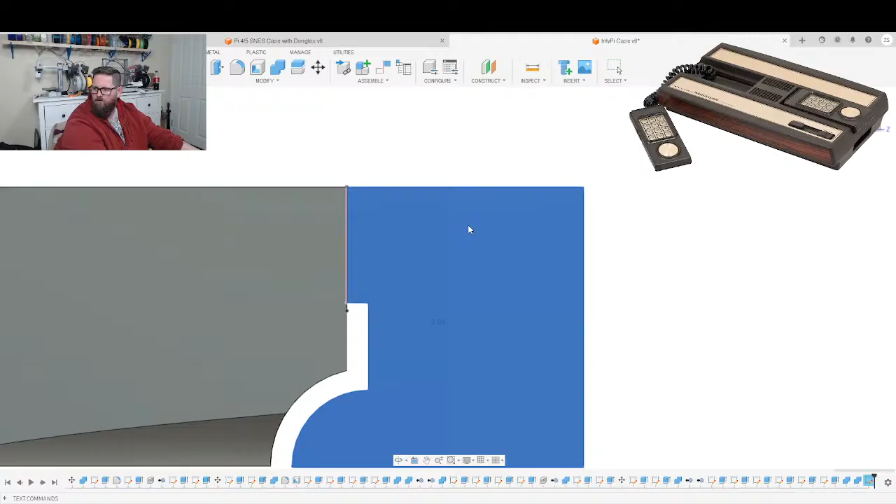What's going on here? That's weird. Why is it not letting me... Very weird, but not a big deal. Don't know why it was complaining about it, but... it's gonna complain on this one too? No, that one's fine.

So then we're gonna do that. And I think we're gonna do a split body.

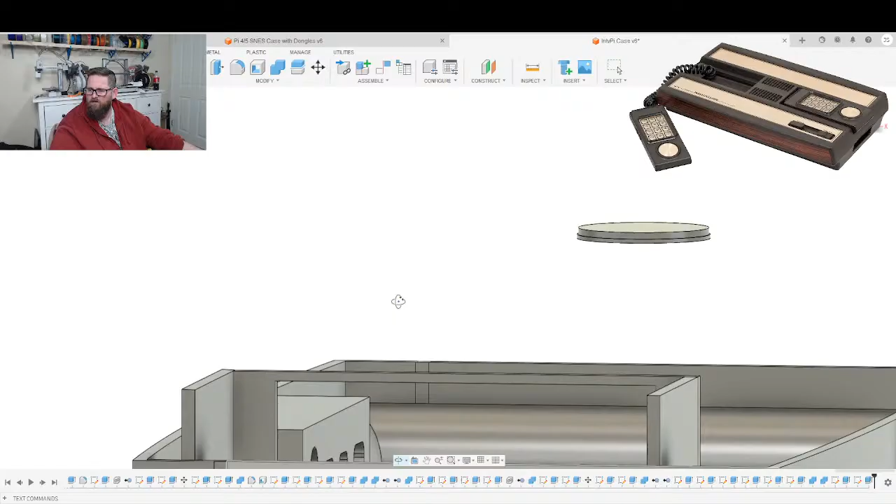Just realizing things look odd. Things look odd to me. Oh. Like, does the top of this look angled? How did that get an angle on it? Right, I'm not crazy, right? If we go across like this and do a press pull, it's going to cut something off of the top of that? Yeah. Weird.

I think that'll be okay anyways. Okay, so next I want to do a modify split body. We're gonna split that guy on here like that. Modify split body, same thing with this guy, like that. Modify split body, this guy and this guy.

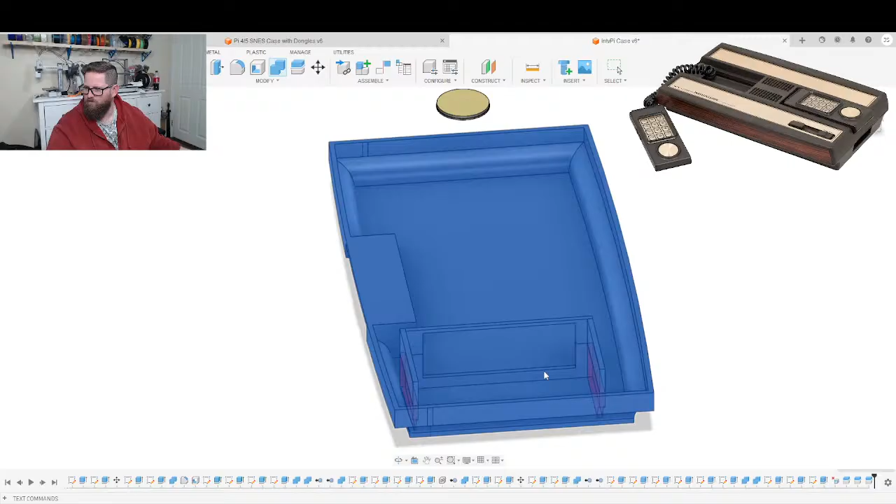So then if we hide the bottom part, actually let's go ahead and combine this with the lower pieces, should be good. Then if we hide the lower half... or not, oh, because it's, I think it was on subtract. Yeah, that's what it was. We don't want to keep the tool pieces. Going to combine it with those two.

Now if we hide this, that makes more sense, and we bring back the top. Tricky, tricky. Why is this not properly matched up to object here? Interesting.

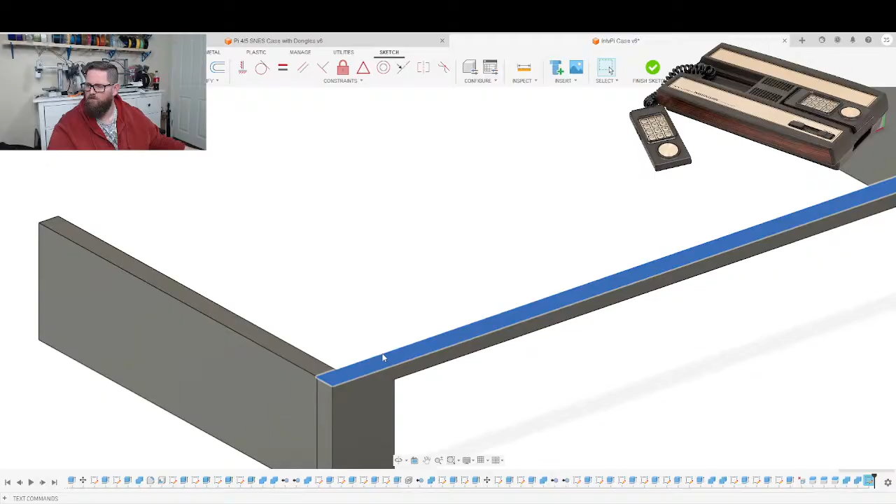No, we're not going to do join, we'll do new body, because I'm worried that when I combine these, it's going to grab these pieces too. And body gone. And we're going to do here, press pull to object. There we go.

And there we go, that should turn all that into one piece. Bring the top back. Do a modify, combine.

And what we're going to do is take this and slide it right through. I guess technically that's just the holes for the Pi case, or for the ports. That's not exactly what we want.

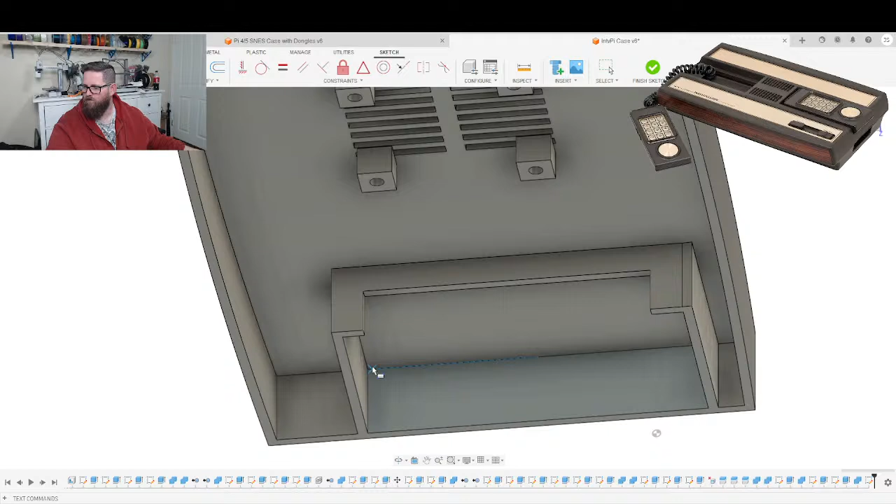Greetings, Mike. Did you have a successful day of not letting the machines win today?

Go to the top part. It's 4, do 1.2.

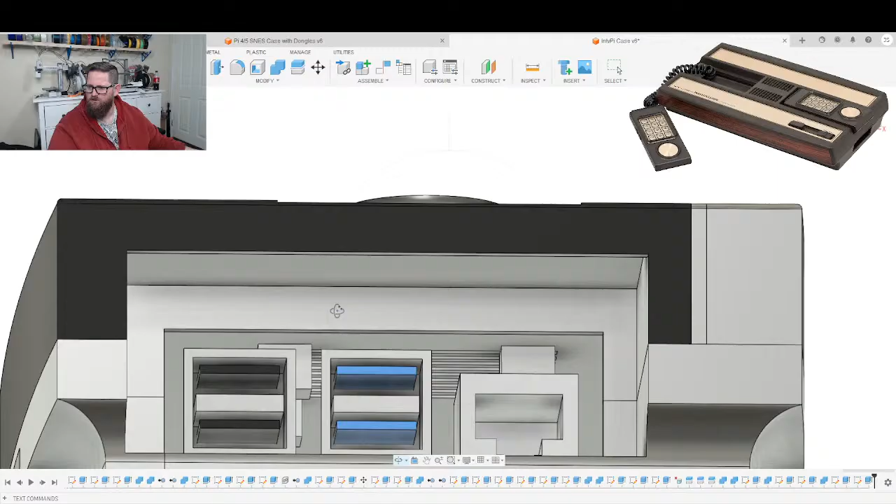Okay, so now if we bring these back together, there's now a married surface there, and if we put the Pi there, the ports are accessible. So I do feel like this could potentially be a little bit tighter, but probably better safe than sorry.

So then the other thing I want to do, I'm going to do a press pull. And we're going to do to object, and we're going to do here, and we're going to... what? New body? There we go, I guess.

And then we're going to do another. This is going to be a line across here because I don't want it to grab that overlap. Actually, I probably have to double check the other one too. To object here, new body.

We're going to hide the top. So what I want to do is the cartridge usually goes on this side, and I want to create an insert cover that makes it look like it's got a cartridge in it, if that makes sense.

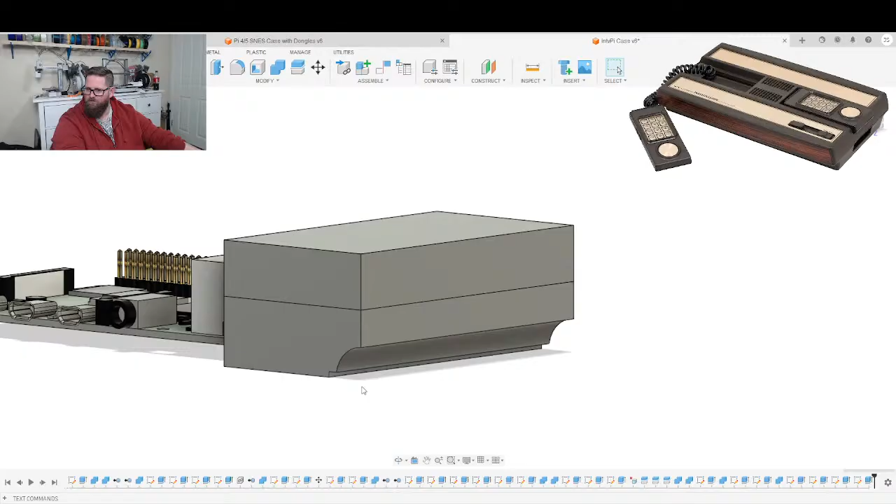So for anybody that's not using the USB ports, now I can actually make this hollow. If I do a combine here, turn those into one thing, and then I just have to kind of take a look here at the bottom quickly to see what the lip is.

The lip is problematic, but I think we need it, right? Maybe not. Here, let's do press pull to object, and we'll make it a little bit thicker here, like that. Get rid of that. That should still be fine, plenty of room to plug in an Ethernet cord.

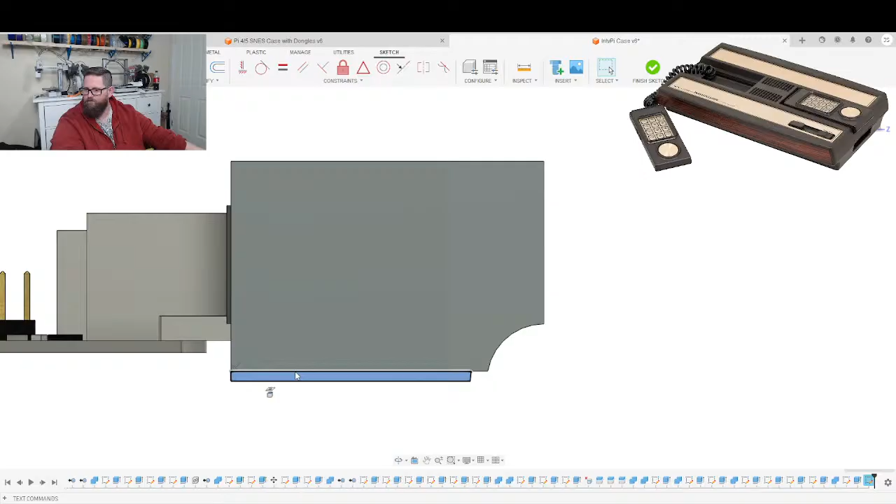Hide the bottom, hide the bottom. Bring this back. And what we're going to do is, first of all, we'll X this guy out. And then this fairly easy to remove, so we'll do this and we'll do 0.2 minus 0.2.

And actually, before we do that, before we add the tolerances, I'm going to bring the top back because I want to line the cartridge up with these guys so it kind of lines up with the controller ports. Doesn't need to be perfect, so let's just bring it down 7mm from there.

And then we're going to create the cartridge, which will make it 7mm thick.

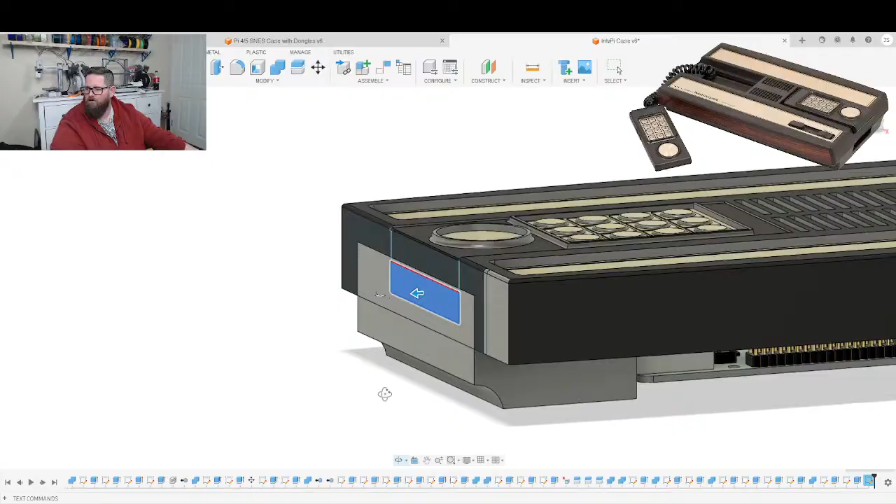Then just want to take a quick look at the image that I've been displaying. Is the image still there? I've actually got it covered up on my side. Is there a cartridge in it? There's no cartridge in it.

Oh, I goofed. I goofed, the cartridge is on the other side. That is okay.

No problem, so let's do a create a shell out of this guy, modify a shell. We'll make it 2mm... let's make it 2.6mm, so I've got some wiggle room for the tolerances for this to be an insert.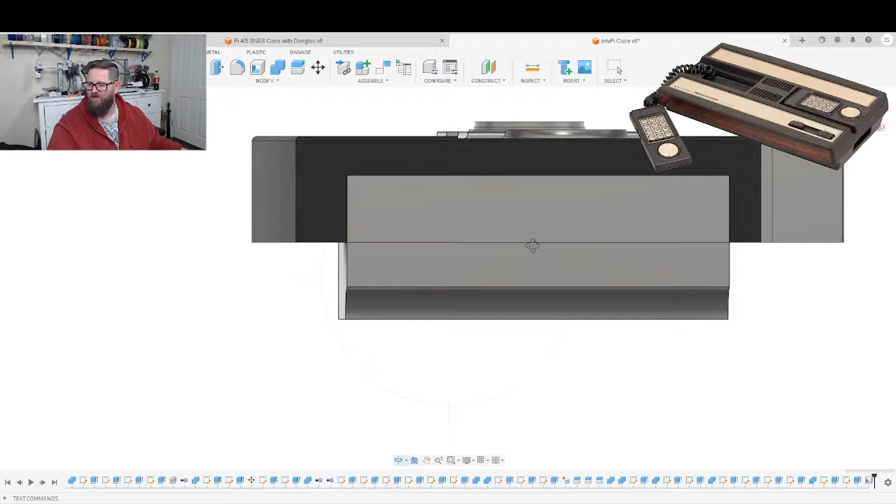Yeah, the cartridge is, I misremembered, it's on this side over here. Just too bad, because that would have worked out perfect. Yeah, because the cartridge would have essentially given you a handle that you could pull this out on.

That's okay. So that being said, we said we went down 7mm and then we did 7mm cartridge. Images, I'm just gonna go pull up a picture to see what it looks like with the cartridge insert to just get the appropriate view in my head.

Yeah, so it's kind of sticking out. It looks like about the same distance as, if we go top here, I'm going to do press pull.

We're going to do a... it's probably good. No, it needs to be more than that, I think. Let's do that. New body.

Jumping back onto chat now because I was off of it there for 2 seconds.

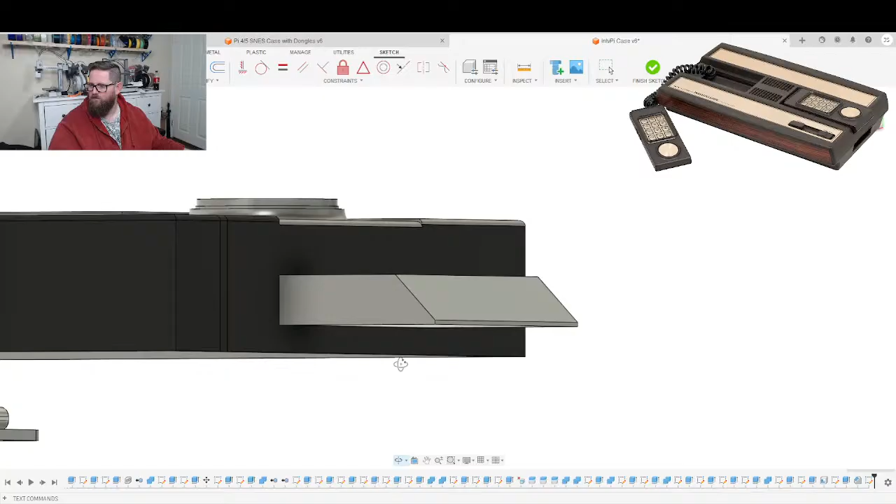So let's make it 1mm thinner. And then we'll do 5.4.

Well, that's a good place to start. That's one of the ones I did when I was getting into it first.

There's lots and lots of dimensional diagrams available online. So if you want to go with a scaled one, that's one of the things I did in a lot of my original Pi cases, is that they were designed to be somewhat dimensionally accurate.

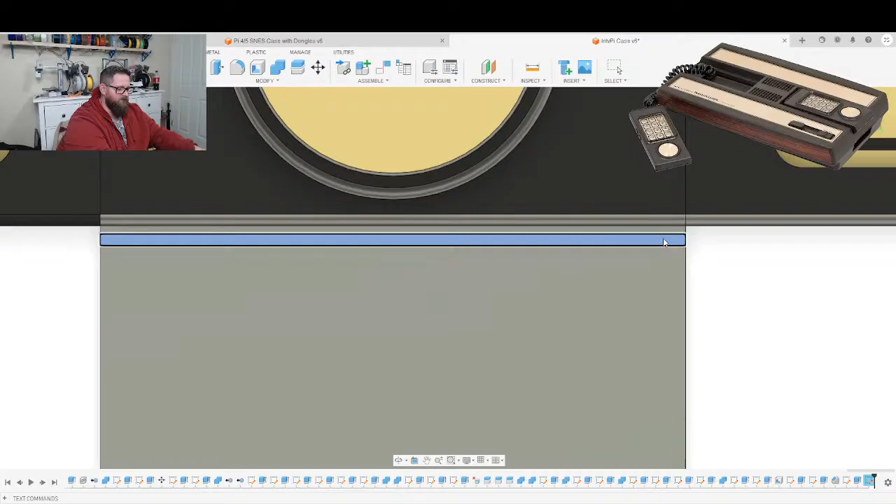So the Intellivision cartridges had a plastic line built into them to show you how far to insert them. That's too much though, it's too tall. 0.4 maybe?

Does look like it's... I don't know, I'm having a hard time getting this to look just the way I'm thinking of it and picturing it and all that stuff.

I'd actually say that cartridge is now too wide. I'm remembering it being as wide as the controller, but perhaps that is not the case.

So let's do a -5. Then a -5 on the other one.

All of a sudden I care about this being dimensionally accurate, even though she's way thicker than the original one.

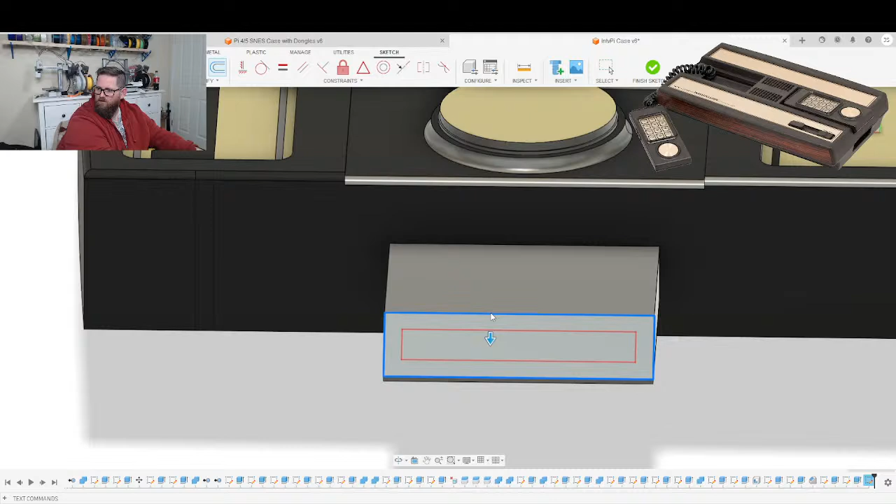That being said, that looks better, so I'm going to call it good, and then we're going to do -1.2 on the offset. We'll just do a -0.4 on the insert there.

Go ahead and toss a coat of black paint on that.

Then we're going to hide the top again. We're going to do an offset of 0.2.

We'll go ahead and drag this out. Bring the top back, cutting a hole for the cartridge.

And we'll do, actually here we're going to frame this part out first. We'll do 2 millimeters for the walls on it. I'm going to press pull, and honestly it doesn't need to be too much.

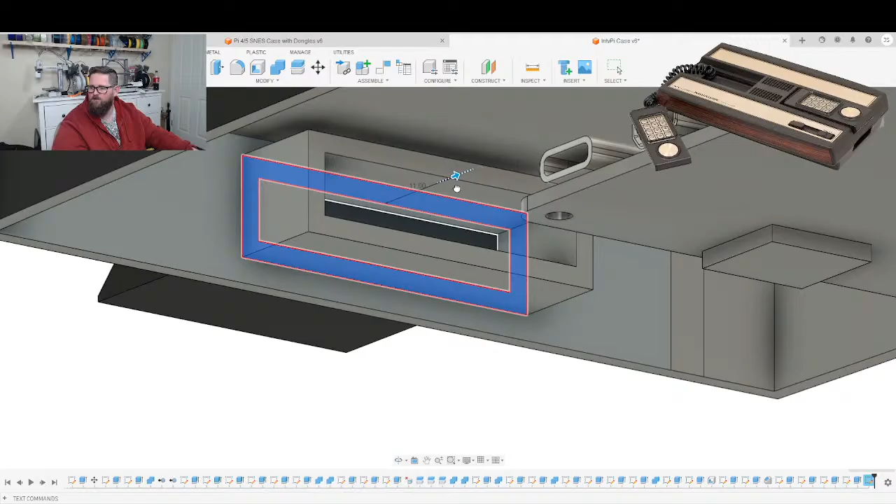12, -2, so that means it inserts about a centimeter.

Yeah, the one thing I wanted to do, might be able to just get away with doing it like this. No, because of the curvature.

I want to connect this part to the top part because it doesn't need to be a standalone piece.

Yeah, I haven't, I don't even know for sure that I've tried Tinkercad myself. I'm not guaranteeing I did or didn't. But if I did, it was a long time ago.

For some reason, Fusion just kind of clicked with me. It just made sense. I don't think it's everybody's experience, but...

Let's see if we can combine all this back into one.

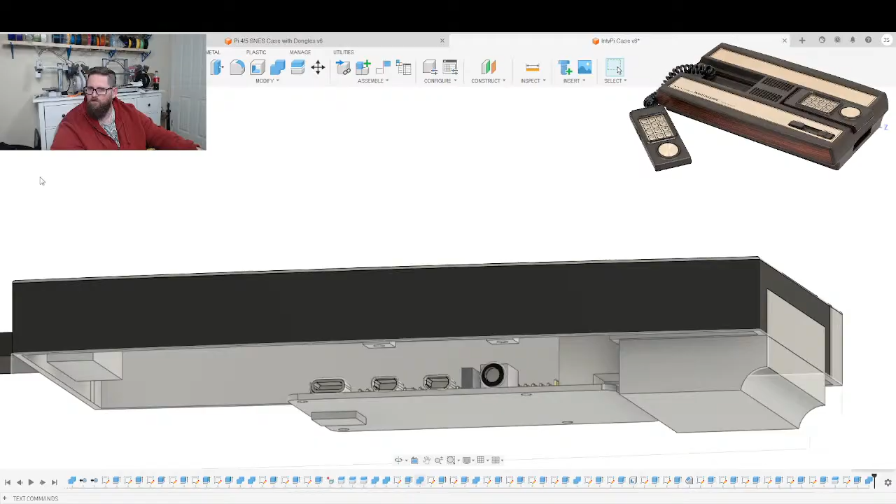What else are we missing from number 1? Yeah, that's fair.

I split off all of my fan mounts.

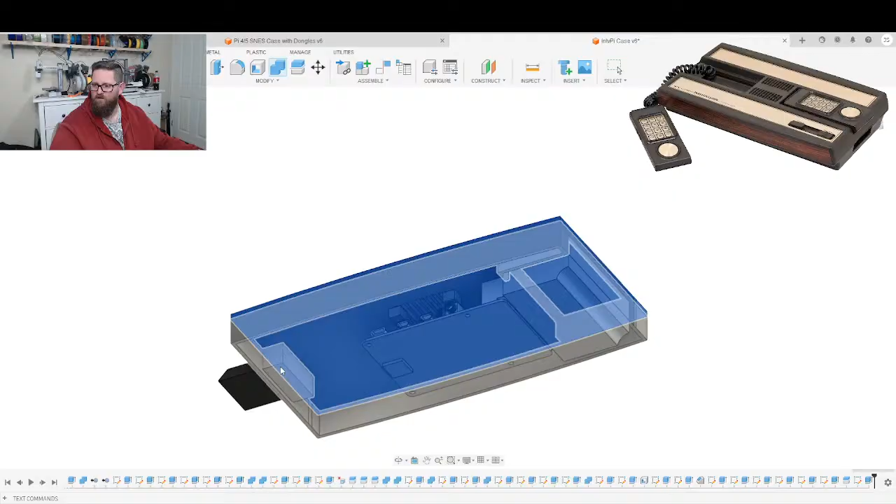There we go. And then we're going to do a combine, and we're going to start with this guy. And then add this and this and this. And this and this. Hopefully that allows us to keep our color coding.

It does. And our bottom, turn it black as well. And then the plug for the side, also black.

I think what I'll do is, very non-scientifically, I'm going to...

Here, let's start off by creating a square that's roughly the same size as that insert. Then I'm going to do a diagonal to get into the middle of it. From there, I'm going to click here, and how big was it again?

That's 7. So I only want to make it like 2 and then 20. 2 and then 20. So I'm just creating a little slot here...

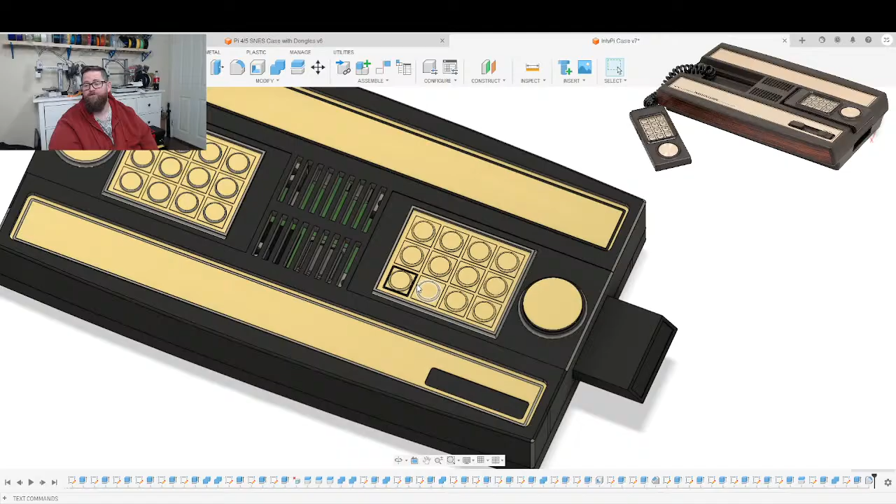We still got to model in the power and reset switch, which won't be functional, but they'll be there. And I got to update the rest of the keypad to this design with the black outline around there. Then I got to figure out how I'm going to get it to print in multicolor, and what the best layout for it's going to be. Really, the most complicated part of this case is that there's no good surface to print it on. I think I'm going to end up printing it this side down on the top, and just let it use support material to support the fan and stuff, and then probably the same thing for the bottom to make sure the curvature on the case ends up looking right. And then we'll have probably the first Intellivision Raspberry Pi case.

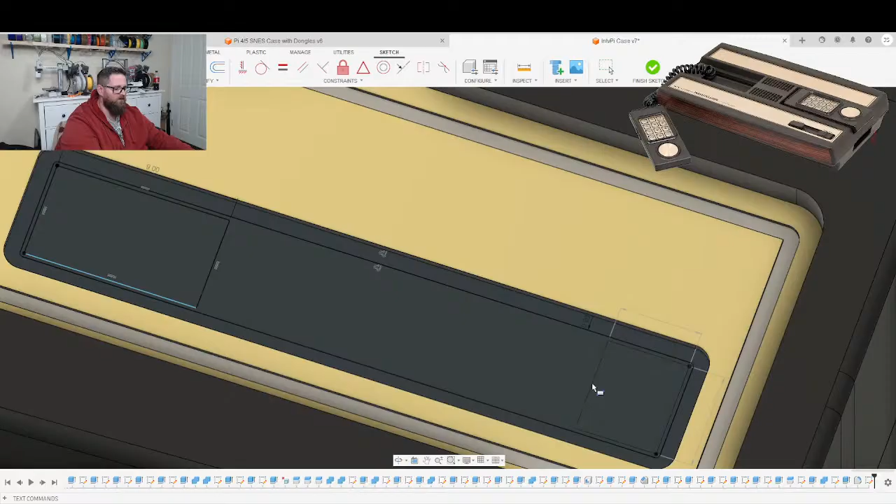Make them 2. That's probably too much. 1.2.

I will. If I don't get a chance to look at it this week, because it's a pretty busy week, I will open it on stream next week, and we'll take a look at it and get you some feedback on that. So yeah, just give me 2 seconds.

I'm just gonna finish this up real quick, and then we'll call it a day. The power switch has a little nubbin in the middle, which I'm going to make a little bit bigger than is true to form, but get rid of that.

Make that 1.6, and yeah, we're kind of almost there anyways. Do a little fillet on that.